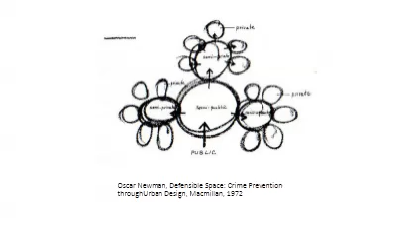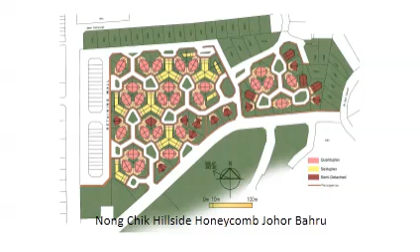In what I call honeycomb housing, small groups of houses are laid around a communal courtyard, like friends sitting around a table. There is good reason to believe that the features of honeycomb housing, compared to conventional terrace houses, make it easier for parents to allow their children to play outside their homes, encourage neighbors to know and interact with each other, engender trust between them, and perhaps even promote helping behavior. A research colleague at Universiti Teknologi MARA is now planning post-occupancy surveys to test these beliefs.

Luckily, I have been able to put these ideas into practice for affordable housing. It just so happens that cul-de-sac layouts, compared to conventional terrace house grid layouts, reduce the amount of land taken up by roads and increase the area available for private and shared gardens. So next, what I hope to do is to apply the honeycomb idea to affordable high-rise apartments.

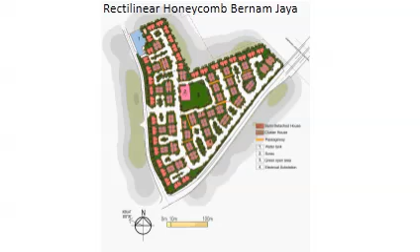There'll be at least two questions that I will address. How do the floors above the courtyard level, and there are 5 of them, get their access to their own 6-story sky court? And will the cost of providing this lavish-looking green courtyard in the sky be exorbitant? Let's begin with the first question. How is it done?

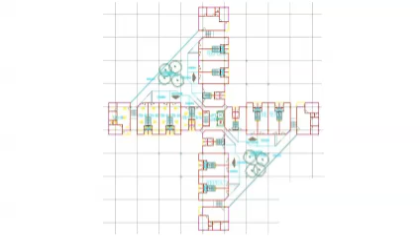The slide explains the problem to be solved. These are 2 sky courts on the same floor. To be 6 stories high, they have to be flanked by 6 stories of apartments. There has to be a central lobby with lifts and a firefighting staircase, and escape staircases. How indeed can each one of the 6 stories of apartments get direct access to a sky court? Let's look at a portion of this plan, a basic module.

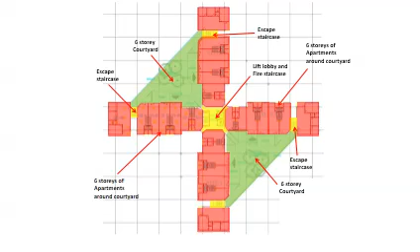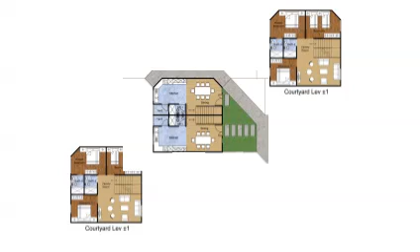The basic module in this layout comprises 2 double-story apartments which occupy 3 floors, one placed on top of the other such that access to both apartment units are on the courtyard level, with one unit connected to another floor above the courtyard level, and the other apartment is joined to the floor below the courtyard level.

This is looking at the pair of apartments from the front. As you can see, the pair of 2-story apartments take up 3 floors, but both can be accessed from the courtyard level. This is the same pair of apartments, but looking at them from the side.

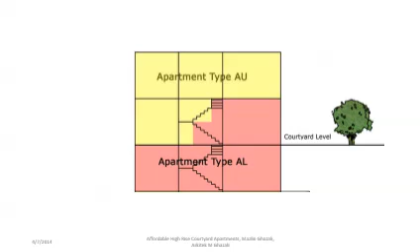Stacking 2 pairs of these interlocking apartments on top of each other produces a 3-story high sky court. However, stacking these apartments on top of each other such that the courtyards flip from one side to the opposite side produces a 6-story high sky court.

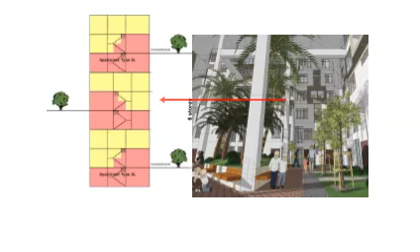This slide shows how each floor in the 6-story high sky court can open onto its own shared and private garden. The first floor above the courtyard level is part of a unit which is on the same level as the courtyard. The second and fourth floors are both linked to the third floor, where there is another courtyard which is hidden from view. The fifth floor is linked to the courtyard, one floor above it.

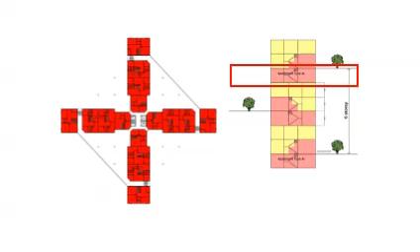This is a look at the floor plans. Apartments on the courtyard garden level either have stairs going down to bedrooms on the floor below, in red, or have stairs going up to the bedrooms on the floor above, in yellow. Above this stack of floors is another similar arrangement, but with the courtyard flipped onto the other side.

In equatorial Malaysia, the blocks are best aligned north, south, east, and west, such that all the 4 sky courts would get sunlight. This design thus allows in plenty of light and ventilation, but provides cover from direct rainfall. This makes the sky courts suitable for planting medium-sized trees, shrubs, and even grass to make it attractive for social and recreational use.

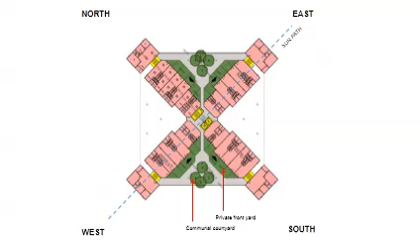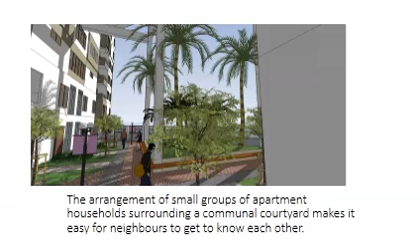Each and every resident in this new type of apartment has been afforded with a shared and a private garden. And so the features of honeycomb housing have been replicated for high-rise.

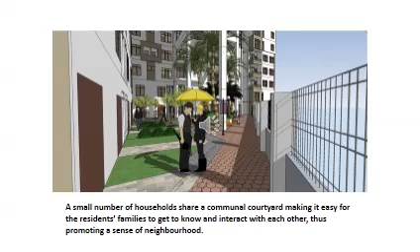So on to question number 2. Will the cost of this new type of apartment be exorbitant, making it suitable only for the high-end market? To answer this question, we designed a 30-story prototype so that it can be compared with conventional types of apartments and help explain how the new concept provides for circulation more efficiently.

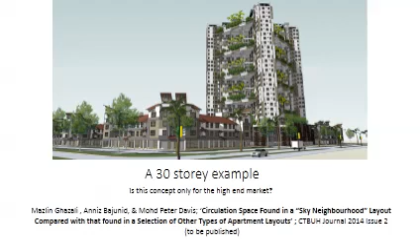In this design prototype, apartments face landscaped 6-story high sky courts. 274 apartment units are served by 16 of these sky courts, each courtyard typically consisting of 16 duplex apartments. On the ground floor of the podium block are the entrance lobby, shops, and the service and utility rooms. On the first to third floors are car parks. On the podium level are 18 apartments, community and prayer halls, and a bigger green area.

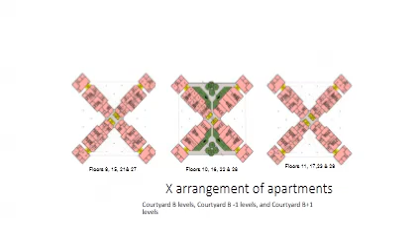These are the floor plans for the apartments facing the sky courts on the east and west. And these are the floor plans for the apartments facing the north and south sky courts. To investigate the circulation space advantage of the Sky Neighbourhood apartment, an analysis of the built-up area breakdown of the 30-story design prototype was undertaken.

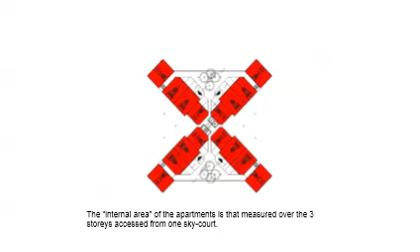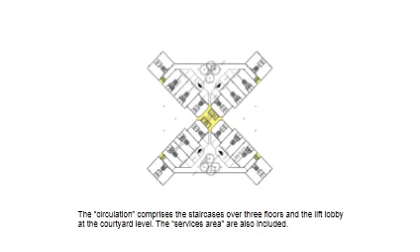Space usage was divided into 5 categories: apartment interior, the apartment external area, the front yard of the unit, which is saleable, the shared communal sky court area, circulation space, comprising corridors, lift lobby, and staircases, and finally, services. This tabulation is that of a typical courtyard and the 3 stories of apartments that are accessed from it.

The table shows that with the Sky Neighbourhood, the circulation space is only 4.32% of the total floor area served by it. With service areas added in, the percentage for circulation plus services is only 5.1%. In fact, this is a remarkably low figure.

To really appreciate this fact, let's now look at some examples of high-rise apartments with conventional layouts. Conventional high-rise apartment layouts may be categorized by the method of access to each apartment: single or double loading corridors for slab blocks and central lobbies for tower blocks.

This is the Balfron and Trellick Towers in London with a single loading corridor. The single loading corridor balcony access allows the apartments to have windows against the access balcony as well as the external wall on the other side. This arrangement is not very efficient, especially with a standalone lift tower. Circulation here takes up 21.06% of the total floor area. That's quite high, but not very much higher than the single loading corridor apartments that are the norm in Singapore.

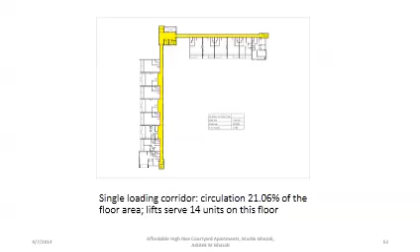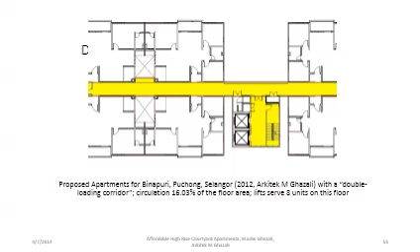Apartments with a central loading corridor is more efficient, serving apartments on 2 rows along it. However, the apartments it serves are only able to have windows on the external wall. They sometimes have internal airwells along the double loading corridors. But compared with a single loading corridor, the ventilation and light from these airwells are not so good. This is a view of Binapuri apartments in Puchong, Selangor, with a double loading corridor. Here, circulation makes up 16.03% of the total floor area.

This is the Blues Point Tower in Sydney. In the tower block, apartments are positioned around a central lift lobby. In this setup, there is a minimum of corridor space, but on the other hand, the number of units that can be served by the single lift lobby is limited. Here, the efficient arrangement of circulation space is offset by the rather inefficient sharing of lifts by a small number of housing units. In this tower block, circulation takes up 11.9% of the floor area. The lift only serves 7 units on this floor.

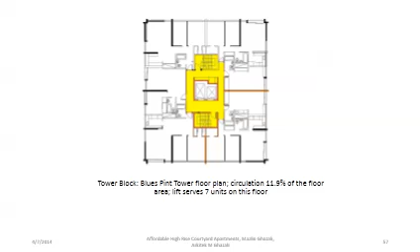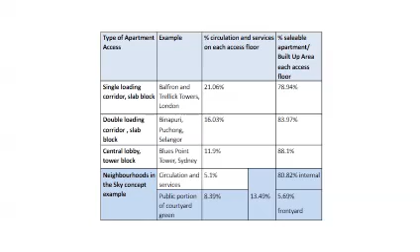This table shows the 3 examples of conventional layout plans and compares them with the Sky Neighbourhood design, where the circulation spaces, including any corridors and services, occupy less than 5.1%. In contrast, the circulation space for conventional apartments range from 11.9% to 21%. Indeed, circulation space in the Sky Neighbourhood design is minimized to less than any existing type of apartment. The sellable apartment space, inclusive of the respective private gardens, is about 86.5% of the available space. This compares well with the sellable apartment area making up about 79 to 88% of the total area in the conventional apartment.

Some may suggest that the courtyard area or portion of it should actually be counted as circulation space. Actually, any space or room will have within it some circulation space. For example, a living room contains within it a portion that is used to move around, but by convention, we simply call it the living room. And when one measures and displays its area, one doesn't minus away the circulation space within that room. By contrast, the corridor is a monofunctional space. Its space is to allow for movement from one area to another and does not have other uses. So it is categorized as circulation space. Displaying the sky court area without deducting the circulation space makes sense and is consistent with accepted convention.

Even when counting in the shared gardens or communal courtyard area as circulation space, the total for it at 13.5% is lower than that achieved in the majority of conventional apartments. This is a very substantial efficiency improvement that is all the more remarkable because it is achieved by making the apartment design more attractive, not less, by extending the benefits of having a landscape courtyard to every apartment. Indeed, the introduction of the courtyard is the key to it.

In another study, the Sky Neighbourhood apartments are compared with 6 examples from the last 60 years of high-rise social housing in Singapore. The floor areas of each of the Sky Neighbourhood and historical examples are broken down according to function and then compared with one another. The analysis undertaken shows that the new concepts, compared with the examples, require much less circulation space. The provision of shared open areas is also analyzed and shows that the Sky Neighbourhood layout provides more open spaces within the block footprint and that these areas are more visible and accessible from the apartments.

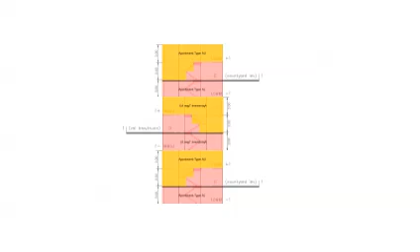Another factor for cost reduction is the provision of lifts. The lifts in the Sky Neighbourhood model only need to stop every 3 floors at the courtyard levels. From the entrance level to each apartment, residents walk up 1 floor or down 1 floor to get to their bedrooms. In this 30-story example, only 9 stops are required on the 27 stories above the car park. I used an online calculator provided by Kone on the design prototype. When I entered lift stops at every one of the 27 residential floors, the calculator estimated that 3 lifts were needed. However, when I entered the actual lift stops required, which is 9, the calculator estimated that only 2 lifts were needed.

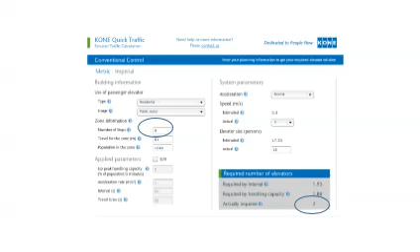The neighborhoods in the Sky apartment layout is a new approach to solving the problem of circulation and intermediate spaces in high-rise apartments. The corridors are replaced with spacious sky courts. Remember that corridors are non-saleable areas that actually cost money to build. Yes, extra costs will certainly be incurred to construct and landscape the 6-story high sky courts. However, savings arising from totally eliminating corridors and reducing lift stops can claw back much of the extra costs.

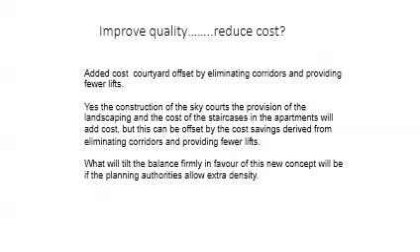Whilst images of corridors can hardly be used to help sell an apartment, about 40% of the courtyard is saleable area, whilst the balance can be marketed as a desirable communal amenity and as a unique selling point. According to this argument, house buyers will be more than willing to pay for the extra cost of outdoor private and communal gardens.

Then there is the cost of land, which in city center development is far more important than the cost of construction. This 274 apartment building on a small site of 1.89 acres produces a plot ratio of 4.9 and a density of 145 units an acre, which is far above the current planning standard in Malaysia, which is only 60 units per acre. If planning authorities can accept the argument that high-rise housing can be socially acceptable, then they might be persuaded to approve a higher density.

The very reason for high-rise housing is the exorbitant cost of land in urban centers. The high density and plot ratio of the Sky neighborhood layout can contribute to savings on land costs. Even a small fractional increase in density will make a big impact in the cost of each apartment and can easily exceed the extra cost of the Sky.

Back in the 1970s, our neighbor down south probably took note of all the bad press against high-rise housing, but then carried on building them nevertheless. Now Singapore is showing the way in how to build quality private and public high-rise housing. Many newer buildings by the Housing and Development Board and private developers already include green and social spaces on the upper levels of tall residential buildings.

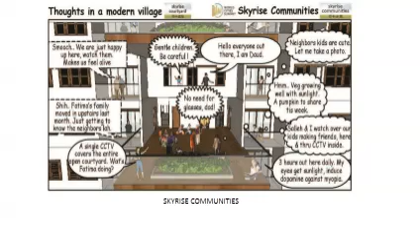There is already an existing menu of ways to produce artificial land in airspace: multi-story car park rooftops, balconies, rooftop terraces, sky terraces, sky bridges, sky-rise communities, and so on. My hope is that the Sky Neighbourhood Sky Court can be a useful addition to that menu. After all, it does have some advantages. For sky terraces, certain floors have to be kept as void to make way for it, but Sky Neighbourhood Sky Courts do not take up space that could have been occupied by saleable apartments.

Compared to rooftop terraces, the Sky Neighbourhood Sky Courts are not placed above apartment units and so avoid the worst problems of waterproofing. The Sky Neighbourhood concept makes it possible that every unit has a front garden and uses a shared garden as circulation space, making possible the elimination of corridors and helping to reduce costs. The fruit of this research that I hope to be able to enjoy is to make possible for each high-rise resident a private and a shared garden.